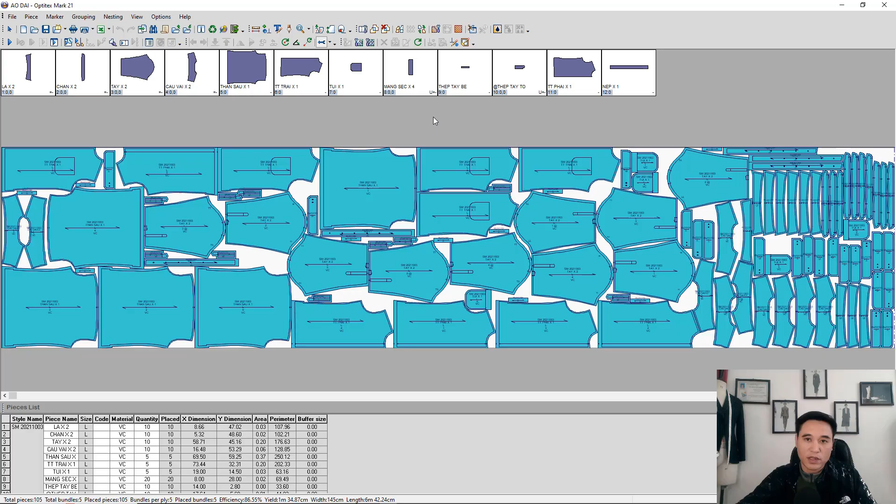Hello everyone. In this video, I will answer a question from a Facebook group.

So it's like this, the diagram that he made ended up looking like this. Let me give an example. Let's say the diagram is 6 meters long. But when they send the print command, the printer outputs it with the layers overlapping like this. That's it. So he asked about this in the group, and today I'm making this video to answer the question for everyone to refer to.

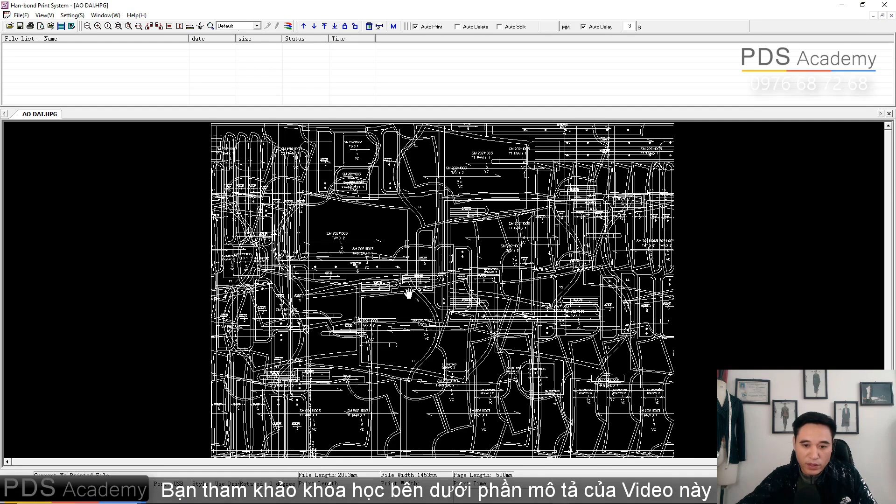So pay attention. When we send the print command, you'll press Ctrl L, right? Plot. Then we'll choose the file path here. For example, I'll select the path to the desktop to make it easier. There, okay? Next, please pay attention to this part, the X here and the Y here. This X here is the maximum length of the diagram.

If, for example, we often work with diagrams that are less than 10 meters long, we should set this value to around 1000, which corresponds to a maximum diagram length of 10 meters. But if we have diagrams that are as long as 12 meters, for example, then we should set this number to around 1500. That means if it exceeds the value for that diagram, it won't overlap.

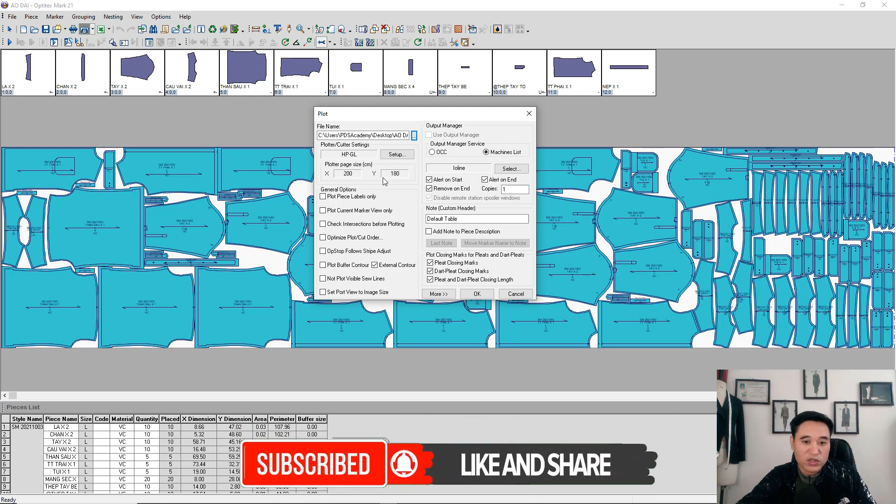As for the y-axis, that's the width of the diagram. For example, if we usually set the width of our diagram or the layout to 1.6 meters, then we should set it to 1.8 meters. But if we use a layout width of 1.8 meters, then we should set this number to about 1.85 meters so that when we send the print command, it won't overlap like that.

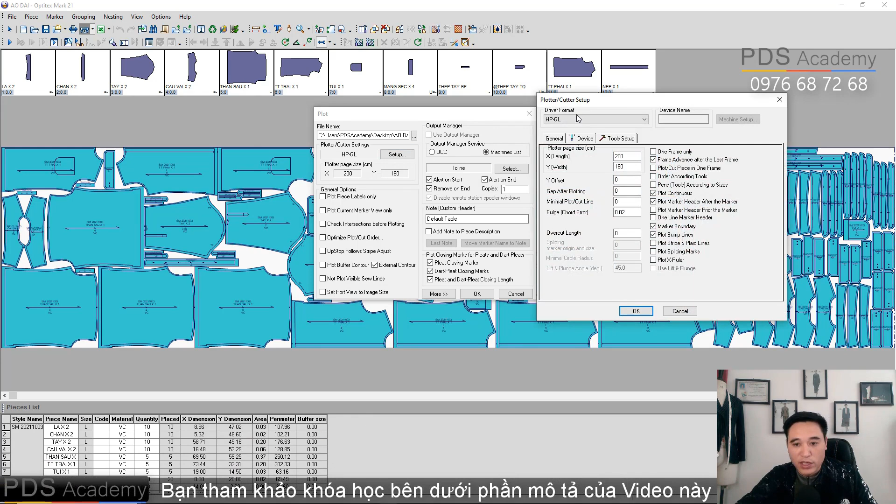So if we want to change this number, you will go into the setup section. Here you will look at the box labeled cutter setup. You will look at the device section, the driver format section. You select HPGL. Yes, that's the default for the print file. So whenever we print, it's always HPGL and any printer will be able to recognize it.

In this X section, the length here, pay attention. If, for example, my layout here is 6 meters long, then I just set this number to around 1000 and that's just right. That corresponds to the maximum length of the layout being 10 meters, okay? We can also send print commands for layouts longer than 9 meters and it's still fine, okay?

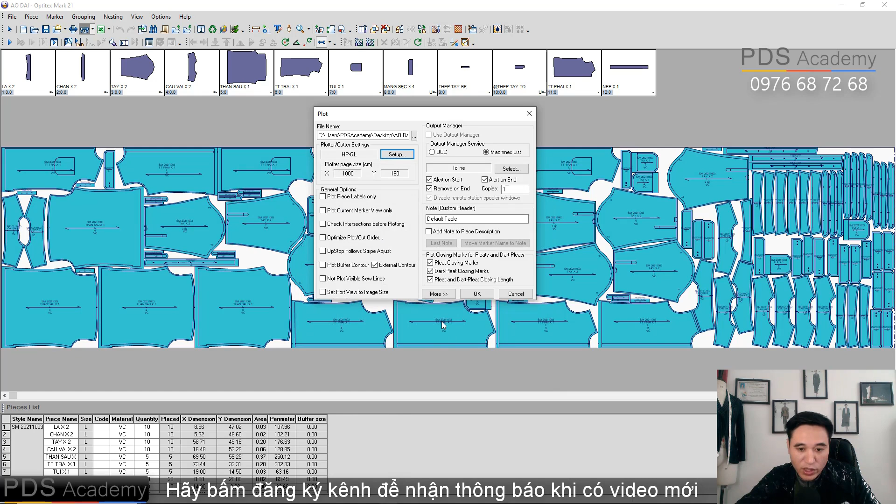As for the width, if our piece here is 1.6 meters, I just leave it at 1.8 meters as the default and that's fine. After that, I will click OK. I will click OK here, yes. Because I already have a layout file available, it's asking if I want to overwrite it.

So now we will open the layout printer there and we will open this file. I will open this file now. Then the details will never overlap each other again. And here I'm answering the question that you asked in the group.